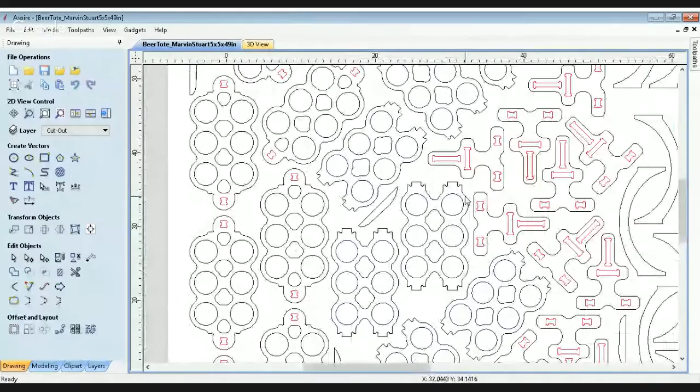No, alright, so let me share my screen. Let me just go screen share. It's on the left, yeah you got it. Yeah, if you're going to send G-code, definitely find out what machine he has and what version of the software it's running, so you can make sure you've got a post processor for that machine. Alright, you guys see the screen here?

Yeah, yep, okay so this is how I've set it up. This is a 5x5 because I can buy the wood by 5x5. But I won't send you this, I'll send you the one. Okay, so here, let's go here, File, open, and I'll go, that's a new one. I'm working on a new version, and I'll go with this one, and then change it.

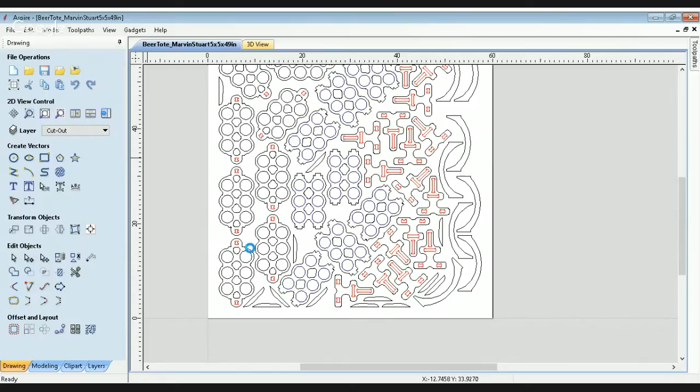It's funny, I have a beer tote also, but it doesn't look anything like this. That's so funny. Well, yeah, the problem with that. Okay, now that beer tote makes more sense.

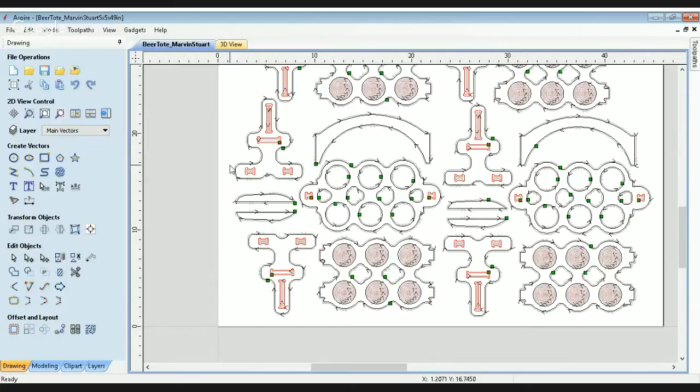So this is the bottom, where you're gonna have little pockets here. And this is the top, where the beer goes through here. This is the handle. So here is where I need to change.

So for instance, if I wanted to change it, let's go over here. I could go and edit. Oh sorry, no, let's go here, do close. Ooh, I hate this mouse. And turn off this, so I can go no. Let's go...

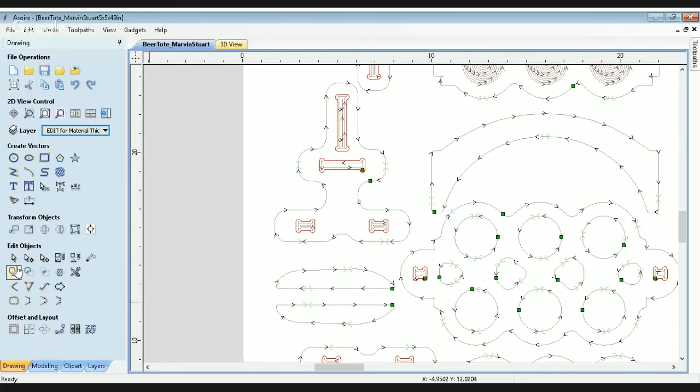Drawing, and I go to here, and it says T-bone fillet. See there, dog bone, T-bone, plasma. I'm like, oh, okay.

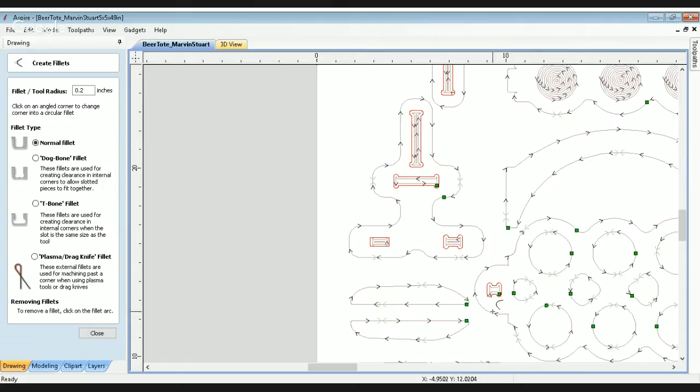So I can go here and take out these, like that. And this is based on the thickness of this here. Yeah, and then you just dimensionalize the box. And I just dimensionalize the box, and then I just put it back again, whatever I want. So if I want to go that way.

That's so cool. I do it the same way. So...

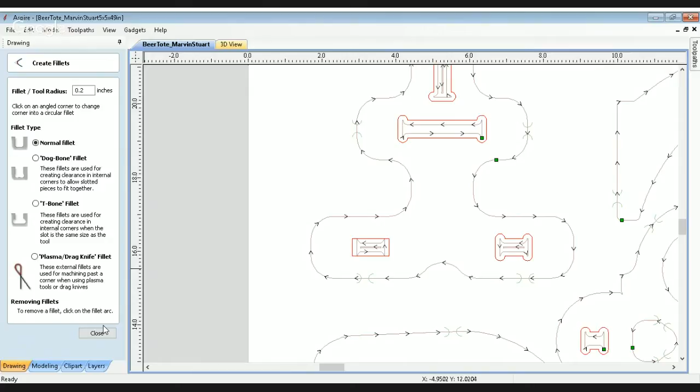Yeah, one of these, I need to on the next call. I'll load up one of the elaborate, ridiculous furniture pieces that I have to do. It'll just be covered in lines. It's kind of ridiculous. Oh really?

Well, it's just all the tool paths and how many things I gotta do. And it's all, some of it's double-sided, so it's like you can't see stuff. And nuts, yes, yeah, see. So this is the one I'm going to send him.

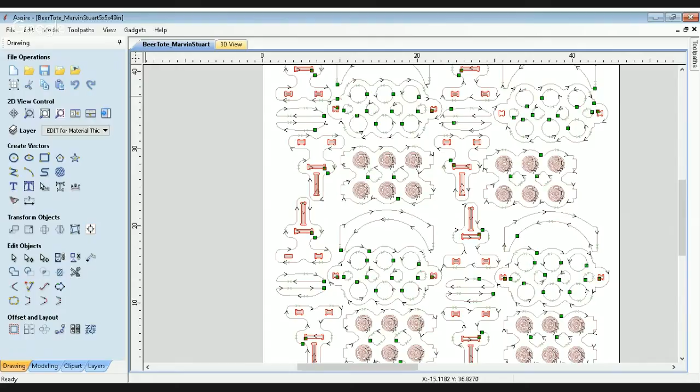So what I had to do is what he told me, that I had to do the nesting prior to the tool paths, or it won't work. So this is all nested, which is 8 of them nested on a 5x5, five feet by five feet. Wow.

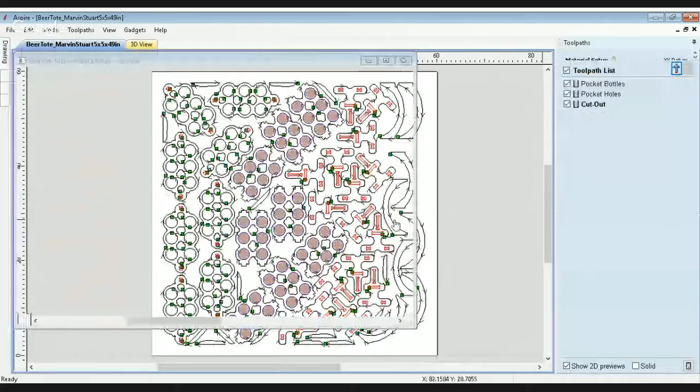And so if I go here, 6, 8 of them, huh? Yeah, 8. And if I go here and go toot, toot, it's gonna go cut them all. Let's see, preview all. I mean, I just like it because I can see, it does it, I can look at it.

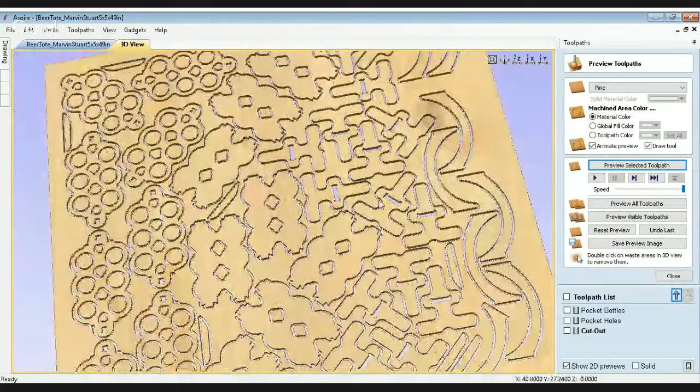Does it tell you how long it'll take to cut? In theory, or, it's wildly inaccurate. Yeah, it says this is 8 hours worth of cutting, and I'm like, oh, I don't think there's 8 hours.

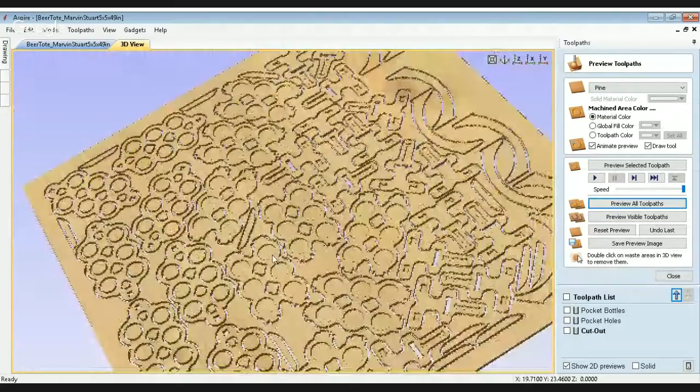Yeah, and the funny thing is that I care less about the 3D part as long as the tool path looks nice. But my wife loves this feature, because I get to see where I make mistakes, and I'm like, where is there a mistake? Like if you're V-carving stuff, or doing a pocket and a fillet, you can actually see, okay, that's too deep, or that doesn't aesthetically look nice. And if you want to round over the edge, you can actually see, okay, I can actually go 2 millimeters less. It's really nice in that aspect.

And then you can see where I can put the tabs. Oh, nice, nice, yeah. Cool, does it generate tabs automatically?

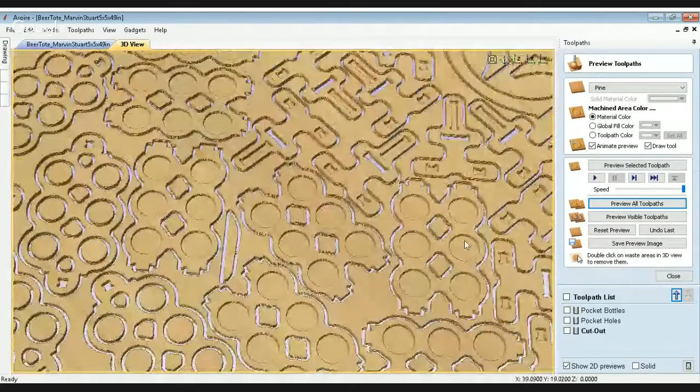Yeah, I can generate tabs automatically, or I can place them where I want to place them, and I can add 2 tabs, 5 tabs. Yep, and you can adjust height, width, everything. Yeah, I can do the same thing on CamBam.

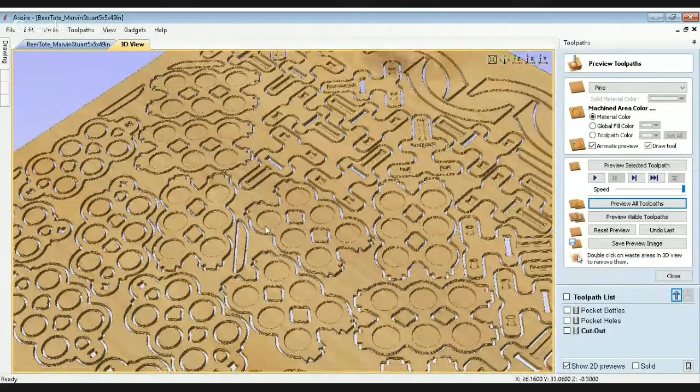Does it have a feature that will automatically, like you said that sheet is 5x5? You have to place them on there to use the sheet, or will it automatically place them on the sheet? It automatically places them. So if I go nested objects, so I have all of this. So I tell it my tool, I tell the clearance I want between each part, I tell the border, the gap on the border here, and I just say apply, and it just does it.

Nice. So I just highlight everything like that, and I say, okay, just do it, and it just does wherever it thinks it's marked to do it.

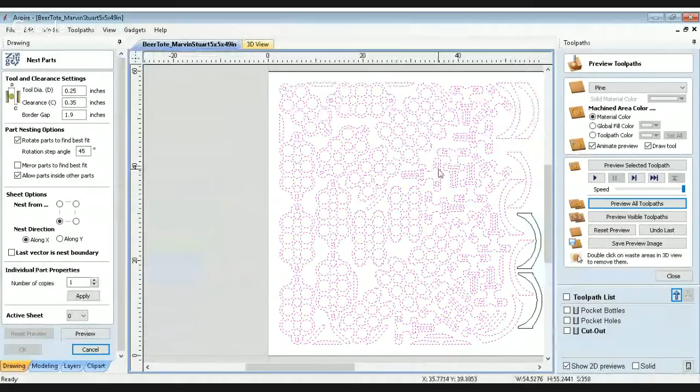This is where I'm talking about, you can pick off the layers and you can switch off which one you want to switch off. That's what I like about it now, and that's something I didn't do before.

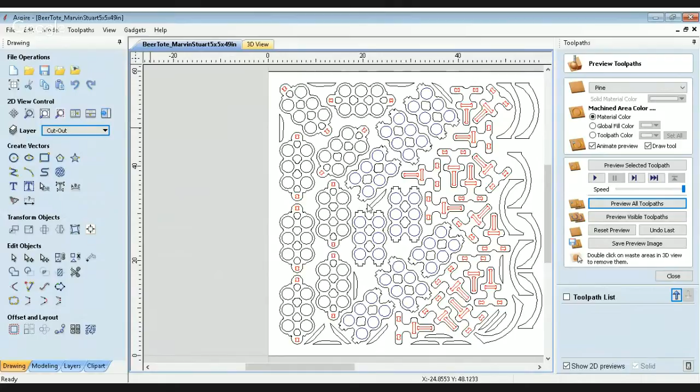Let me show you another one. New version, come on. Okay, that's the bottom. I think that nesting might be worth the cost of admission. That's pretty cool, I gotta say. All right, so let's give you an example.

This, I'm working on another one. So this one is kind of the same, but instead of having it go through the other side, this will be the handle now. So this will go here, inside here, and there would be something underneath these little tabs here. And I'm going to put a little box here. I'm sorry, I'm laughing because that looks remarkably like our wine totes.

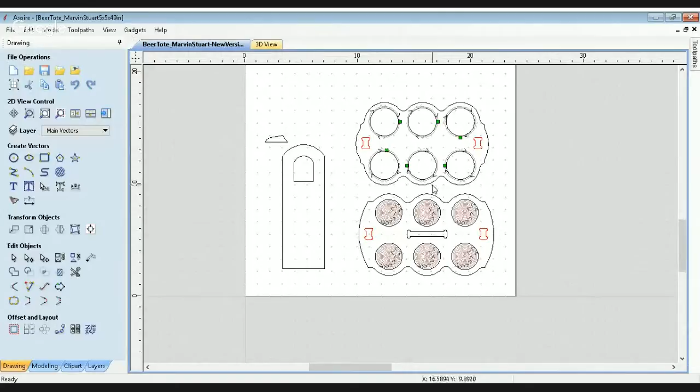So I'm like, okay, I'm going to figure out. This one is going to go in the center, and there are going to be little two things here. So, like for instance, good example.

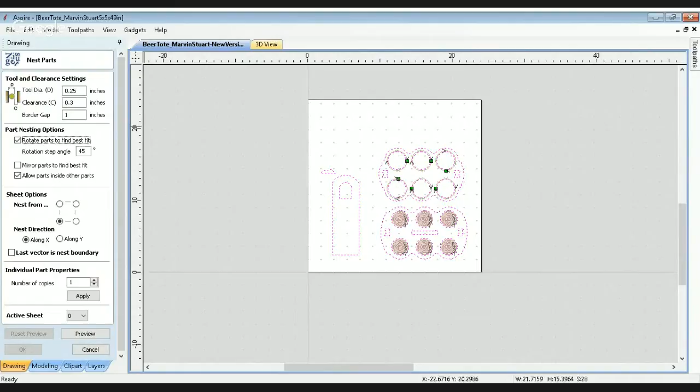So here, I want to nest them. So I just go here and say nest. I tell it the dimensions. I say, my tool is 0.25. My clearance is, I want 0.3 from each other. The gap from the 1 inch, and I go preview. It just puts everything where it needs to go.

See? Yeah, nice, it just moves things. As you increase your material size, it'll add more and more of them. So I can add 10, and I'm like, okay, let me nest them, and I say, okay, can it work? Can it fit? Can it not fit? That's pretty cool. Yeah, that's just 2 foot by 2 foot.

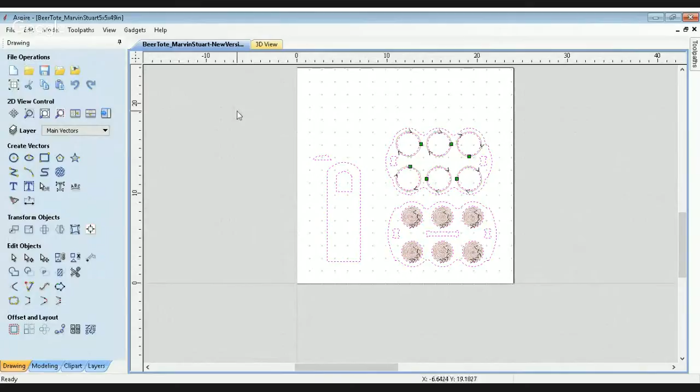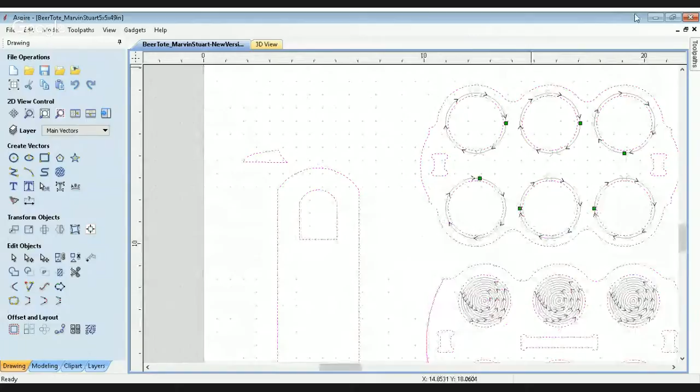And so, he says that he uses another software. The only other software I can use is SketchUp. I'm not very versatile with all of these, Fusion and all of them. So I use SketchUp and this. A lot of times I try to draw in here. So I've gotten used to using it. It's not the greatest in the world, but it's not bad either.

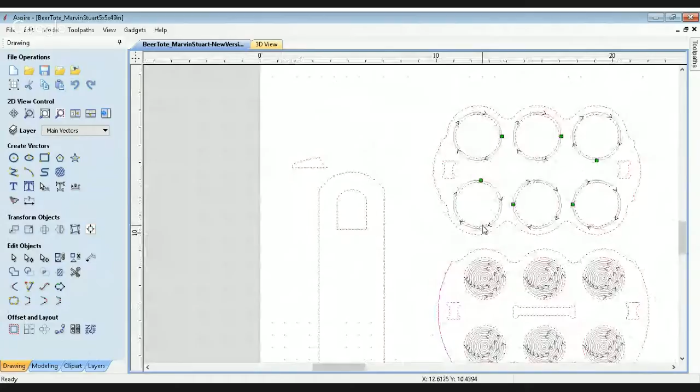Yeah, my biggest problem is precision, because for example, if I'm trying to, typically in Fusion what I would do is draw one half of that and then mirror it to the other side, then find a center and put 2 cross lines. Okay, I want a hole here, and then I dimensionalize it to, what is it called?

Parametric. No, it's when you mirror, like when you make a circle and you want 16 of them, you mirror. Oh, it's the pattern, the array. So then I would just pattern it, and then from there I would just remove the outside edge, and then you could do offsets to create additional circles. It's just, for me, ironically, easier in Fusion than to even attempt to do something like that in Aspire.

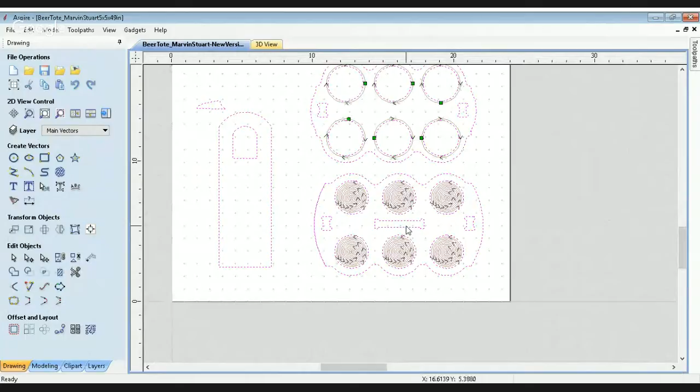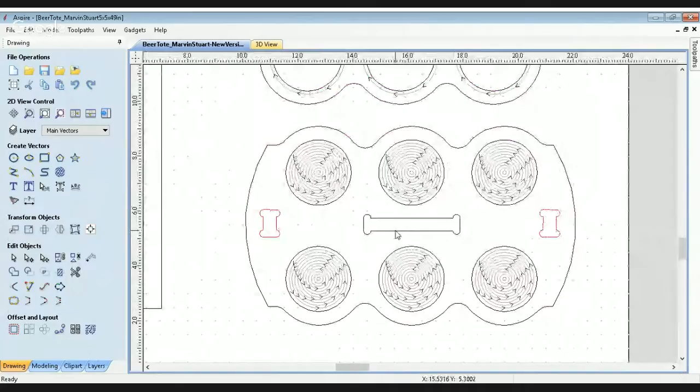And Aspire is hard to do because when I draw it, I want to measure it. Like, for instance, I want all of these to be in alignment, and it's very difficult to say okay, all of these align with each other now. If I were using SketchUp or one of those, I could just align all of them. Yep, it's kind of weird.

I mean, the post-processing and CAM part, I love. It's one of the reasons why I really like Aspire, but the CAD part, aside from putting text on things, it's not very good in that aspect. I couldn't draw like a circle with text in the center, and then put something at a specific distance from the center. It's not impossible, but it's hard as crap to do in Aspire.

That's true, but that's awesome, that's cool. I think Aspire's greatest asset is the tracing, the post processor, the tool paths, setting up tool paths and things. I'm very comfortable using that.

Yeah, my favorite is, for example, I'll have one end mill, but I'll have 3 different profiles for it: one for plastic, one for light aluminum, and one for wood. And then you can create subfolders for it, it's called your tool chest or whatever. And what's really nice too is that wherever that folder is stored, you can actually share it.

So when my wife loads it up, if I add a tool, it appears in her copy in Aspire. I like it. I have Art Fusion, but I've tried to use it and I'm just not comfortable yet.

I go back to my go-to, which is SketchUp. Use whatever is comfortable. There's so many different CAD CAM packages out there, you just use whatever you're comfy with. SketchUp works for me because I'm not doing anything intricate enough that I need this great CAM and simulation. All I'm doing is cutting a little box, 2 inches by 2 inches, or 5 inches with a circle in the middle. Fusion's for a different breed, I guess.

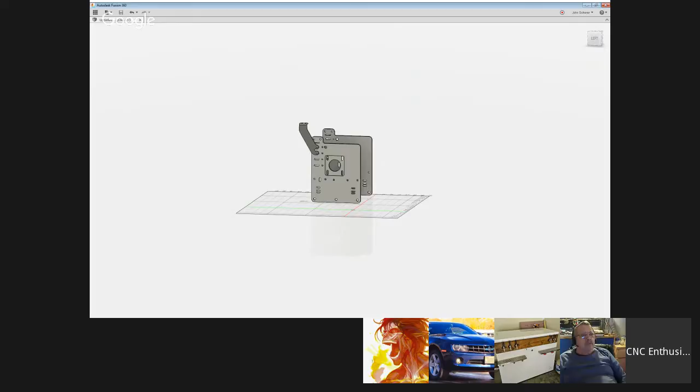So see that bracket, Eves? That's what they use on the 1000mm. Oh, okay, I thought it needed to present itself. There you go. Hold on, yeah, you're presenting now. Present to everyone. Now I am, okay. So yeah, it's just this funny little bracket that's only used on the 1000mm. They do it different on the 500. I have no clue why, because it would work fine on either of them. They do some weird things.

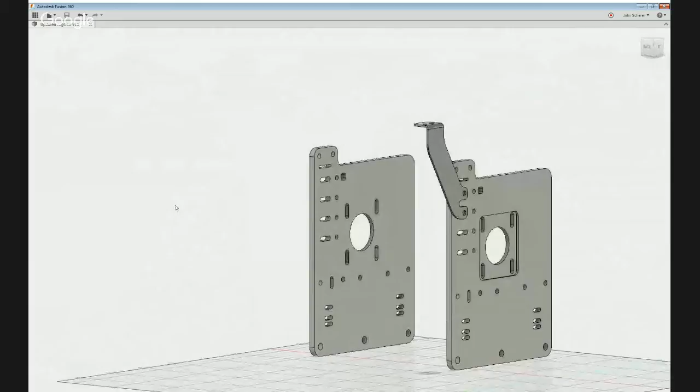Okay, so do I have to move the belt hold? Well, I guess I haven't tried this with everything on it yet. I can send you that model if you want to play with it. I have one that's complete, everything on the left is complete, so you could just dump it there to see. Oh okay, I'll try that, yeah.

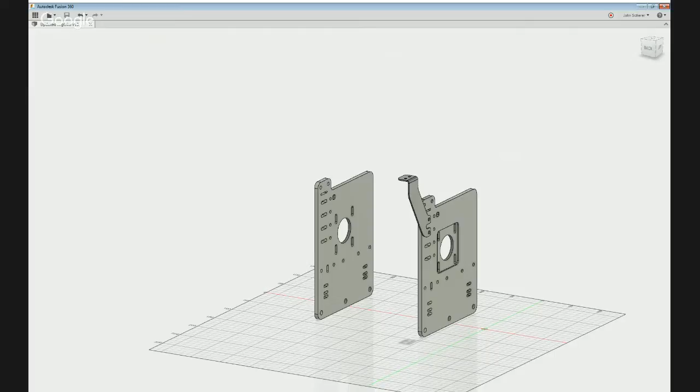That's probably the next step. I need to fully populate a full-blown X-carve with all the new plates, I haven't done that yet. I have my machine, my model of my machine with those end plates and everything works. I didn't know on the X-axis where the drag chain went. I think it's a back plate or some kind, or a back bracket of some kind.

Oh, that's right, I was supposed to take a picture for you. I'll do that. The existing setup, what they do is it bolts right to the gantry, to that center MakerSlide thing, so they just bolt it directly to that. It seems like there's also a little L bracket that they have. It could be that, I'll have to double check.

But all we're talking about, guys, for these end plates that we're developing, is just to make sure that any existing X-carve hardware they may have would work with it. So if they had the existing X-carve drag chains and wanted to upgrade to these brackets, they can still use them. That's the goal.

My machine is dirty as hell, so pardon the mess. Notice I'm not in my shop. Dave knows what I'm talking about. Yeah, we haven't seen your shop since you got rid of the steam engine.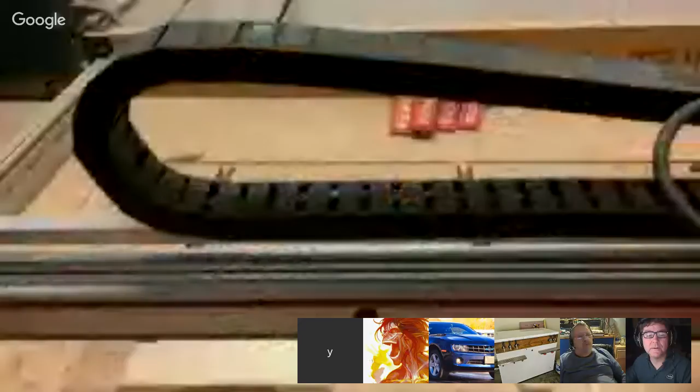Hold on, present to everyone. There you go. I turned his camera on.

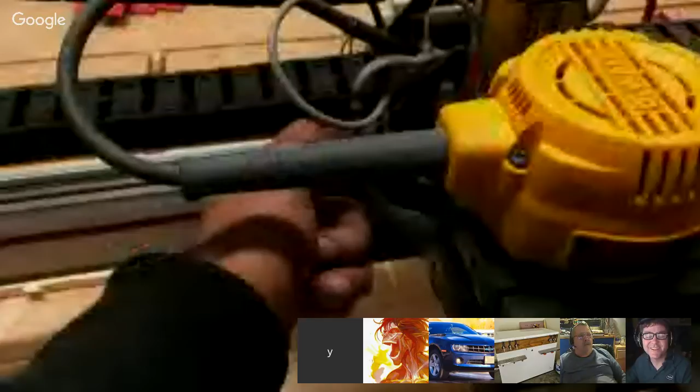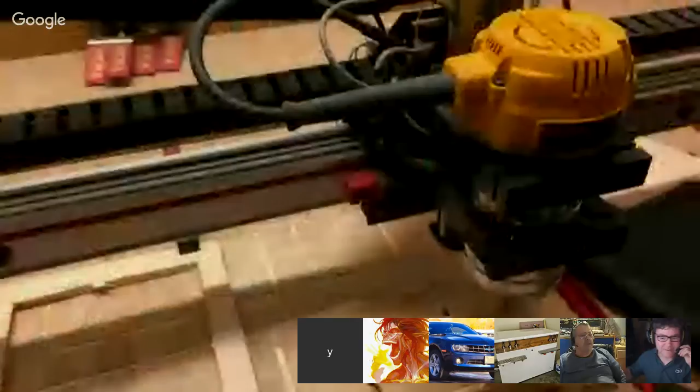Camera on. Bandwidth, yeah. He's only got 50 megabits per second. Only? Well, he's fiber to the house, I think. Yeah, I'm sure he is. That's how I had my Shapeoko when I first had it too. That seemed to work out pretty well.

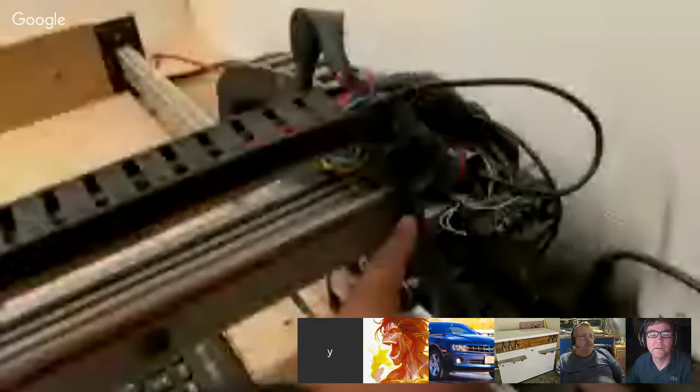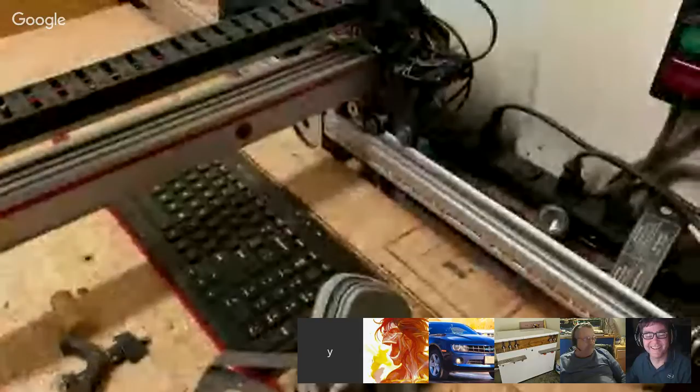What? You can unmute yourself. I didn't mean to make you use sign language. Oh, I didn't realize I was muted over there. So all this time I was talking... god damn it. Go back to square one.

What I was saying is I have the old Shapeoko 2 plate, so there's enough clearance on the inside to run the drag chain through it. But on the X-Carve, that's not possible at all. So I'm assuming that's why they have it going out like this, which I don't know how it's able to hold up its own weight.

But on the other end, I have a short piece of 2020 coming out of the side. This hole was already here, and I'm running the drag chain attached to that with some T-nuts. So that's why I have that extra hole on that plate, is to accommodate that. And then the DB25 to breakout thing, and the DB15 will completely replace all of that.

Remember those things I sent you a while ago? Yeah, so you are going to try those? Yeah, I have them, they came a while ago. So that should clean up a lot of this crap.

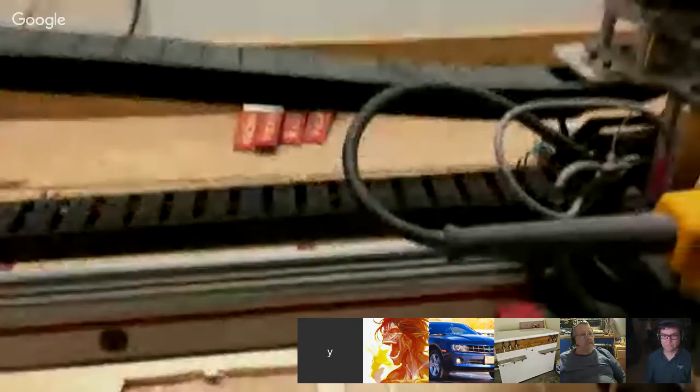I do like it in the center like that. That way you don't have anything hanging off the back. And then I have - oops, almost tripped over my own damn mic - this piece of aluminum in between, so the drag chain actually sits on that. So like I said, there's tons of clearance in the Shapeoko 2 plate, but not that much on the X-Carve one, so I'm not sure.

Very little, yeah. So that's why I wasn't so keen about changing these out. I kind of like this setup. Well, you don't seem to be having many problems with it, so.

No, currently not. I mean, I may make another plate that's narrower, so it'll give me a little bit more left and right, and then move the end stops in some, because there's no holes here, but there's conveniently a long slot here, so that's where these guys are mounted. But with the C-beam, I won't need to do these anymore. I'll have some other plating.

Yeah. But, thanks. Whoa.

I actually did a vertical bracket to mount a sensor vertically. Let's see here, where is it? The one thing I didn't show you, but I'll take a picture of because the video will be kind of stupid - I actually put the tool sensor embedded into the bed. Which is redundant, but.

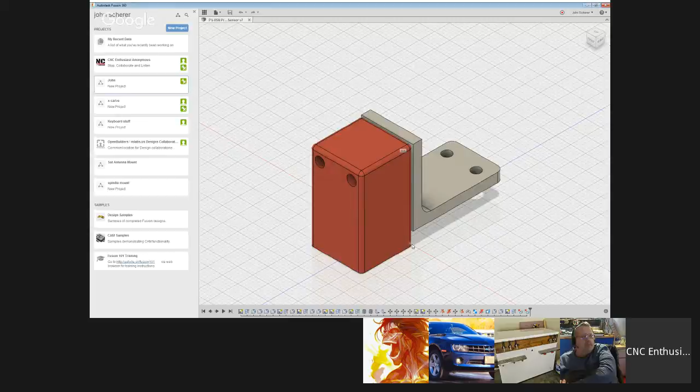So on the MakerSlide, this would go on the x-axis end plates. And on the MakerSlide that's on the Y, you've got those channels, and I would just put a nut in there that this thing would sense as a target. Okay, and that way you get away with just one sensor per axis.

Cool. My whole story about min-max is that's how I wired it in the very beginning, and I don't want to unwire it. I may end up going the way you're going just because I don't want to deal with the bracket, and these inductive sensors don't like coming at stuff at an angle. They like to approach it head on, they work better. I've already found that out with the smaller sensors. I just was wondering if these would work better, but we'll see. I'll probably just do it the normal way first.

Well, like I said, 24 volts and you'll be golden. Yep, I got them, they came, I didn't know they were coming from China. Took them almost 20 days to get to me. But wow, they're cheap though, like $5 each, $4.80 something a piece. I think Tyler ordered a bunch of them too, he's putting them in as well, the same ones.

Did he finally fix his machine? Yeah, he got the new MakerSlide in, they sent it to him. That's right, he tapped it, got it all up. I think he's just been busy with school. Thanksgiving is coming, then Christmas vacation, I suspect we'll hear a little bit more from him after Christmas.